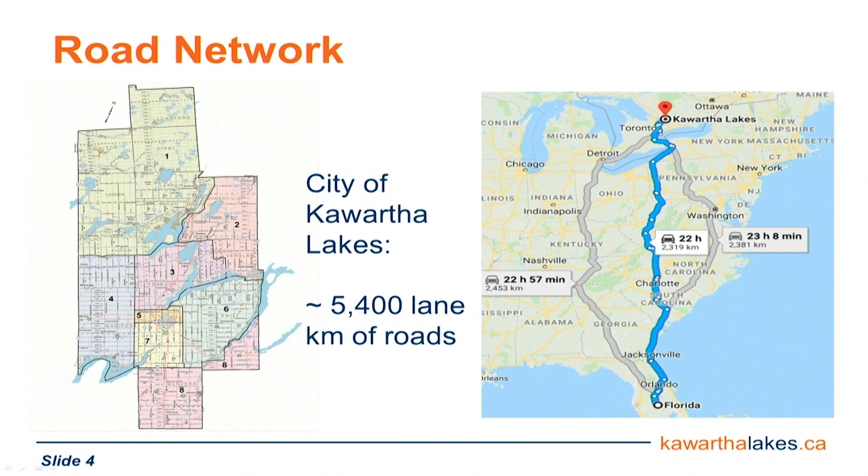Our road network is 5,400 lane kilometers of roads, and you'll hear the other directors speak about our roads as being 2,700 kilometers. They're talking about just driving down the center line of those roads. But actual lane kilometers to go both ways is 5,400 lane kilometers. So if you look at driving to Florida, which some may have done for March break, you could actually drive to Florida and back and still not have driven all of the roads within the city of Kawartha Lakes. Similarly, you could drive out to Vancouver, to the east coast of Canada, and partway back and have used up our roads.

So let's put that into some context about what that means as far as budget dollars and how we can fund the road projects that we're working on. If we look to the city of Toronto, they have approximately 80 households per lane kilometer of road. They have roughly 3 times as many roads as the city does, but they have 30 times as many households.

Coming a little closer to the city of Kawartha Lakes, if we compare it to the city of Peterborough, they have roughly 37 households per lane kilometer of roads. So they have actually similar households to us, but they have 5 times fewer roads than what the city has. And then finally, in the city of Kawartha Lakes, we have roughly 7 households per lane kilometer.

So when we're talking about that from a budget perspective, maintaining our roads is our biggest cost in the budget, and we're trying to spread those costs over 7 households on a lane kilometer basis versus the city of Toronto that can spread those costs over 80 households. So it's much bigger context.

So in summary, what we found in putting this presentation together is our maintenance costs are going well beyond the rate of inflation. We've seen increased weather-related events impacting that budget, both from a maintenance perspective and a construction perspective. So as we look to update our long-range financial plan, we'll need to take all of that into account so we can continue to invest appropriately in our roads going into the future without it being a significant burden.

And that concludes my presentation, unless there's questions.

Okay, so I'll hand it over to Director Rojas.

You're looking very sharp today, Director. I just want to point that out.

So my presentation is going to be focused on the capital aspect of roads, and Director Robinson will focus on maintenance.

From an organizational chart, so you have this in your budget book, and a lot of the information here is in your capital budget book, both capital and operating. This is our structure in engineering and corporate assets. We have 4 divisions plus the airport. Two of them, the ones in blue, mainly deal with the lion's share of capital roads.

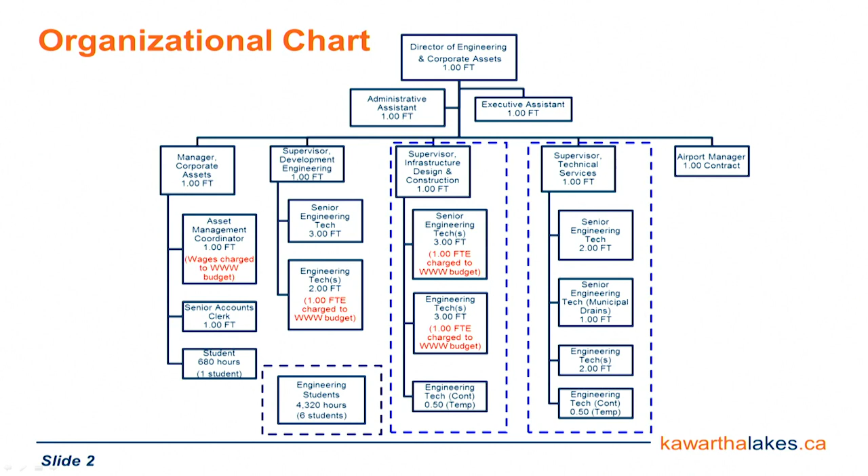So on the next slide: we have infrastructure design and construction with 1 supervisor, 3 engineering techs, 3 senior engineering techs, 1 seasonal, and that's for our resurfacing. He works a 6-month period, plus 2 students that help out. On the other side, we have technical services: 1 supervisor, 2 engineering techs, 2 senior engineering techs, municipal drains which are related to the roads, 1 seasonal who does the overlay for rural resurfacing, and 3 students.

The other two divisions funnel into the capital roads project in various different ways. Development engineering oversees private development, both private development and subdivision development. So through the course of time, when that subdivision development is assumed, we essentially inherit those roads. Any large subdivision, once the roads are inspected, we assume them and they become part of our database, our asset management base, and then they go into their life cycle of reconstruction and maintenance. Corporate assets is responsible for the life cycle analysis and the funding strategy of the roads. So everything is sort of intertwined with each other.

So different types of roads. This is our typical urban road standard. What our urban road means is it has curb and gutters on both sides, here and here, with a sidewalk on one side, fully serviced, an asphalt surface, and a street light.

Here's a nice example, a nice wide boulevard for snow storage. The property line is somewhere over here. The sidewalk is really close to the property line, and a hydrant and a grass boulevard. This is a typical, ideal urban road standard - no ditches, fully accessible, nice and wide, so you can have on-street parking and snow storage in the boulevard. Wherever possible, on any new subdivisions, this is what our goal is for an urban cross-section.

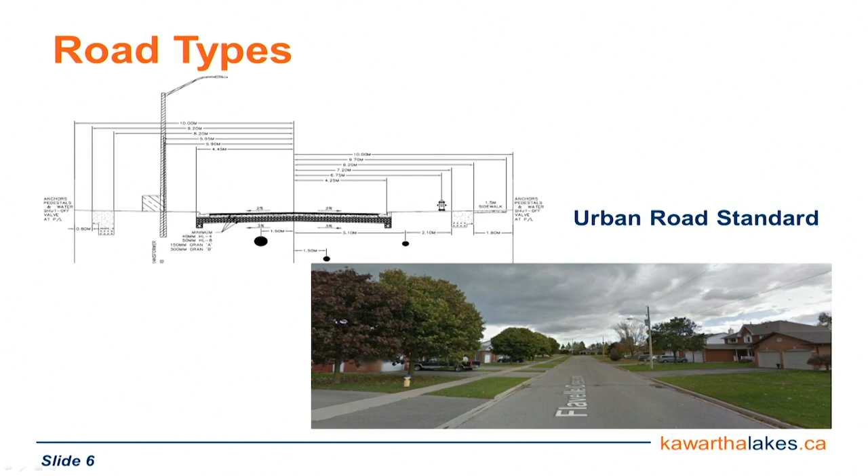So rural road surfaces. There are 3 different types, but they all share the same characteristics. There's a granular base and ditches on both sides. The ditches are low enough so that the granular base can drain out to the ditches and the water gets away. And again, this is an ideal situation.

Some roads have street lights, some don't. That just depends on where they're located. And then the utilities are usually buried or overhead. You can see a light here, and the utilities are buried. You can see nice ditches here and culverts underneath the driveways. This is an asphalt surface.

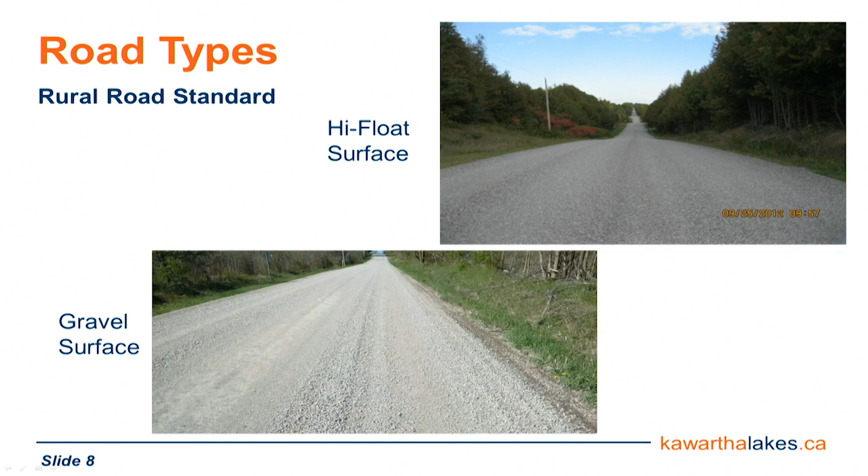We also have a high float surface. Again, ditches on both sides with hydro overhead, and then a gravel surface. Ditches on both sides with a nice wide platform. So those are essentially the 3 different types of rural cross-sections, 2 different types of roads.

So then we move on to classification. How do we classify our roads? Director Robinson will expand on this because it's also related to maintenance, but just strictly from a classification point of view, there are 2 driving factors that we classify all our roads by: one is speed, and one is AADT.

AADT is just your annual average daily traffic. It's the total volume of vehicular traffic on the road divided by 365 days - a straight calculation. We do traffic counts every year to maintain our database, and the rest we do estimates. Every 4 years we do a roads need study, and then we update the majority of our traffic counts. So there is a bit of a 4 to 5 year lag, but we troubleshoot the ones that we know.

And then we apply a growth factor, so that's how we come up with the ADT, and then speed. Depending on what the speed is, it triggers a category 1, 2, 3, 4, 5, or 6. So just an important note: if you look at this column, 6,000 to 7,999 ADT, that same volume of traffic could be a category 1, 2, 3, or 4 road, depending on the speed.

So for example, we have no 100-kilometer roads, so we have 90-kilometer roads. Most of our roads are either 80 to 71 or 51 to 60. So if we take an 80-kilometer road with the same volume, and we reduce that speed from 80 kilometers to 60 kilometers, it drops the category of road from 2 to 3. And that has certain implications, which we'll get into a little bit later. But there is a correlation between speed and ADT.

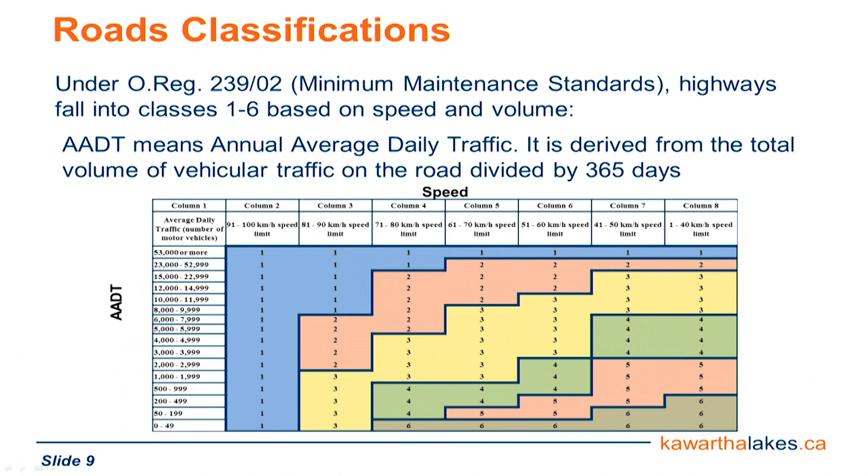So here's a chart, a summary of the 2,700 kilometers of centerline roads, and this is how they break down. We have no category 1s - an example of category 1 would be the 401, because we have no roads with that high speed or that high volume. Our biggest one is CKL 36, which is an example of a category 2. Here are just examples of the various categories. Most of our roads are classified as collector roads, either category 3 or category 4, so almost 1,400 are category 4.

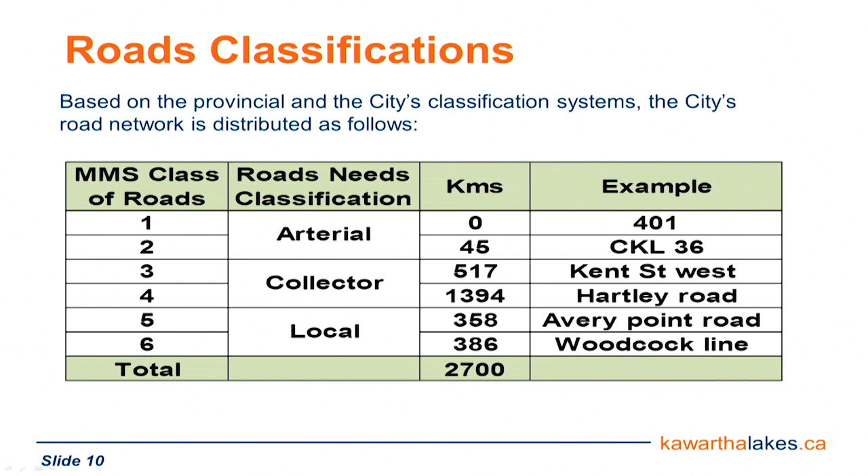This is from our roads need study. Every 5 years we hire an independent consultant to ride all our roads and rate them in accordance with the minimum maintenance standards and our standard rating system.

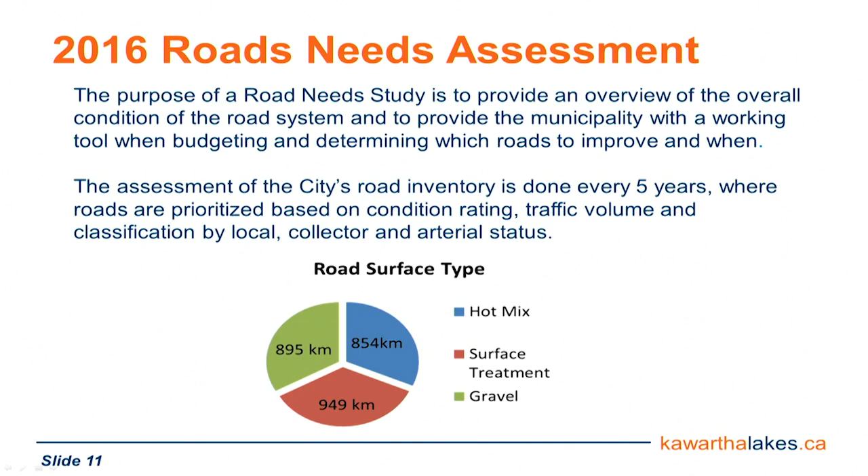It breaks down as follows: we have roughly a third, about 900 roads in each category, for hot mix, surface treatment, and gravel. This forms the basis of our long-term plan. We categorize the roads, rate them, and prioritize them based on both volume and road classification, so higher volume, higher road classification gets priority for dollars.

That's been our strategy moving forward, and for the last 10 years. The asset management plan was completed in 2016, and the roads need study done in 2016 was incorporated into our asset management plan in 2017.

During that presentation, there was a strategy of life cycle extension. How do we keep our good roads good? There are different strategies for that. One is to focus on your now needs, your poor roads now, and invest in that. But also preventative maintenance or preventative capital dollars, where if you hit the road prior to it hitting a threshold, you extend the life of it.

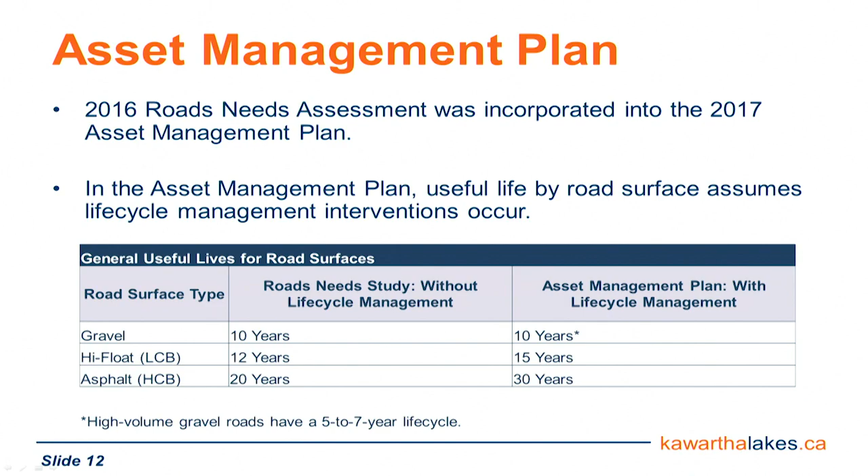That's what this chart tells you. For gravel roads, it's a wash, because gravel roads you regrade. Most of our gravel roads are on a 10-year life cycle, so every 10 years we add fresh gravel, a couple inches, to the surface. There are a few higher volume gravel roads on a 5 to 7 year life cycle, but the majority are 10 years.

High float roads, with no preventive maintenance, would get 12 years. By adding some preventative maintenance, we extend that life to 15. This 12 is a little generous, it's usually 10 to 12 years. Where you see your biggest return is in your asphalt: with no preventative maintenance you get 20 years before you have to touch that asphalt road, with a little preventative maintenance you extend that to 30 years.

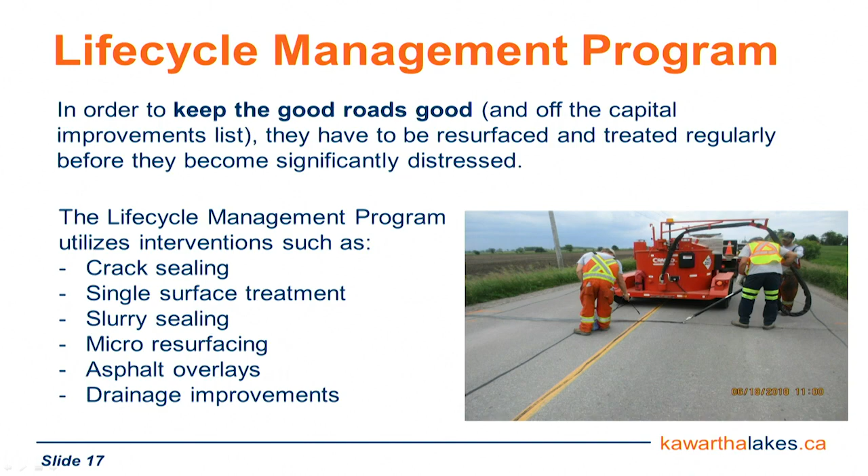It's not a full overlay or full reconstruction of the road. It's troubled areas that have experienced a lot of wear and tear over the winter — isolated sections that we could get into and repair. The strategy for life cycle maintenance is to keep our good roads good. The majority of the $1.4 million, about $1 million, is going toward keeping the good roads good, and $400,000 is going to troubled areas.

The next slide shows a typical life cycle of any road. You have time on one side and status on the other. The time varies if it's gravel, asphalt, or high float — anywhere between 10 to 20 years — but the curve is the same. You reach a point where, for asphalt, around year 10, if you let it go, the road falls apart real quickly.

This is a graph we've seen over and over again — it's sort of an industry standard. What it's telling you is that if you spend $1 here rehabbing the road before it gets to disrepair, you're saving 80 to 75% of the cost.

$1 here to do the same work would cost you $4 to $5 elsewhere. So that's our strategy of keeping the good roads good.

You don't want to get past this line, this is fair. Once you get past that point in the graph, it becomes poor, very poor, serious, and failed. So you don't want to be doing work in this area.

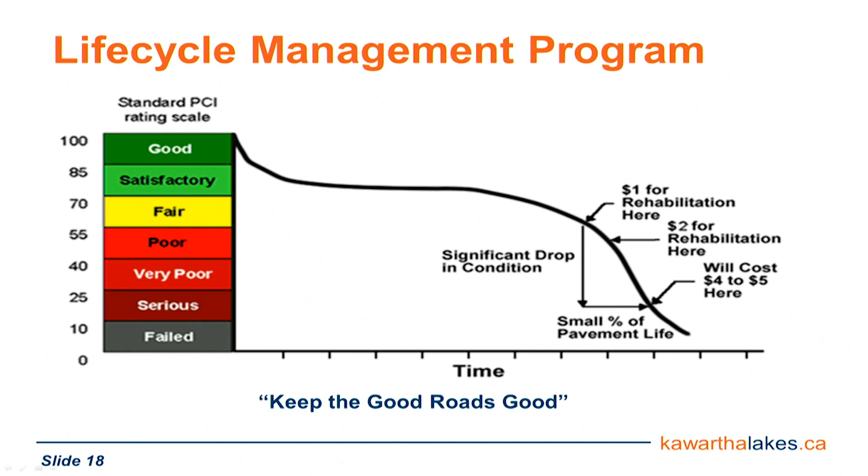The balancing act is we can't afford to do all our roads today, so we have to prioritize them and stage it. That's why we have a 4-year staging plan to gradually bring our tax base up to that sustainable level.

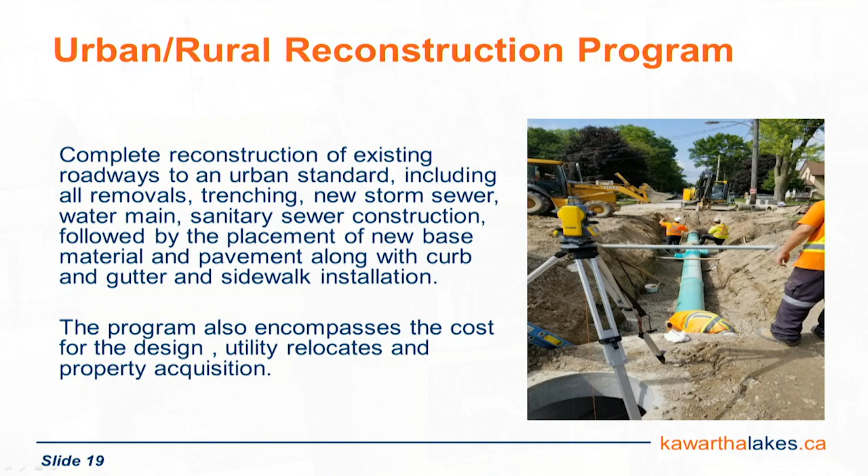The next program is urban rural reconstruction. This is a full reconstruction of the roads. We rip out the road, replace the granular base, replace the underground servicing if required, brand new sidewalk, brand new asphalt. It's the most intrusive to residents because you have a big ditch or excavation across the road. It's the longest, but it refreshes your asset.

Then we get to the resurfacing program. The resurfacing we broke up into urban arterial resurfacing. These are the higher volume roads we go through. Some of them through town have a gutter, some don't. That's why it's urban and arterial, a combination of both, but essentially they all get asphalt.

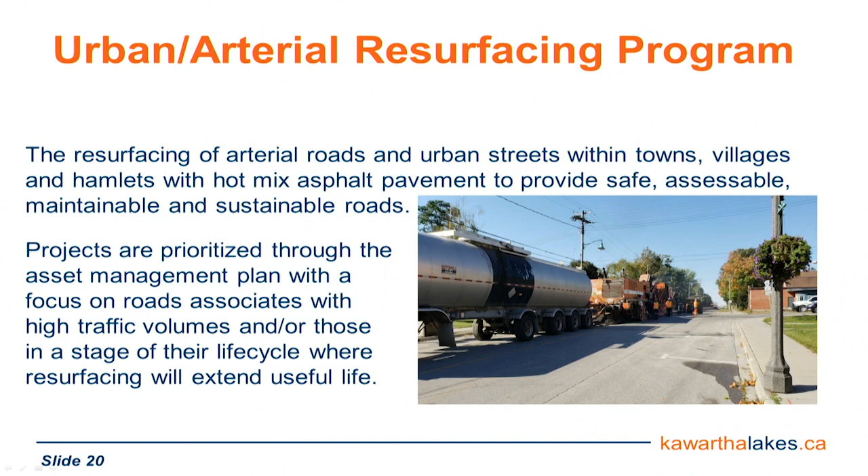There's a list of roads every year. This tender just closed about 2 weeks ago, and it's a duration from when the asphalt plant's open, May to November, is the scope of the road. We just overlay the road, we pulverize and overlay the road.

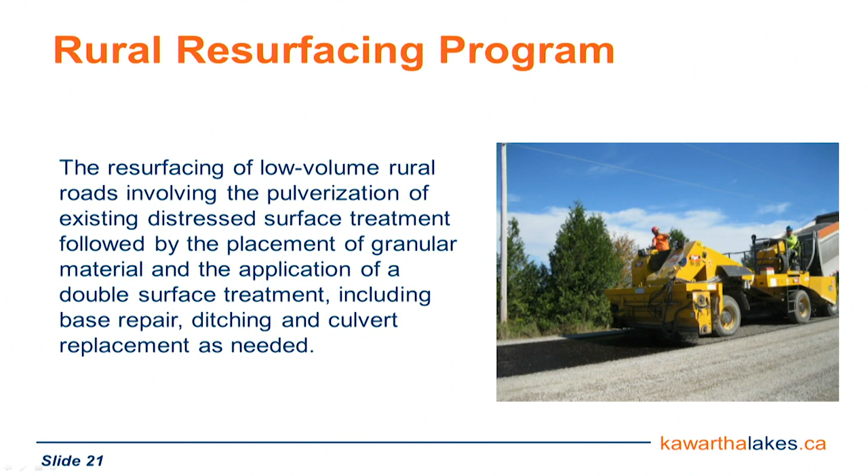The next one is the rural resurfacing, similar to the urban arterial resurfacing, but the majority of this is high float instead of asphalt. There are some asphalt sections, but high float is the majority of the money. We add granular base, and then we slurry seal and high float the driving layer, along with ditch maintenance and then whatever culverts need to be replaced. These are all rural roads, all over the county, fully rural cross sections.

And the gravel resurfacing program. So right now, our threshold - and we might talk about this later on - our threshold for when is it a gravel road, when is it a hardtop road. A hardtop road is high float or asphalt. The threshold we have is 400 AADT.

So those roads, we have a 10-year life cycle. And then we recognize there are some roads that are slightly higher traffic. So 200 to 300, we put them on a 7-year life cycle, and then 300 to 400, we put them on a 5-year life cycle. There are a very small percentage of roads that are over 400.

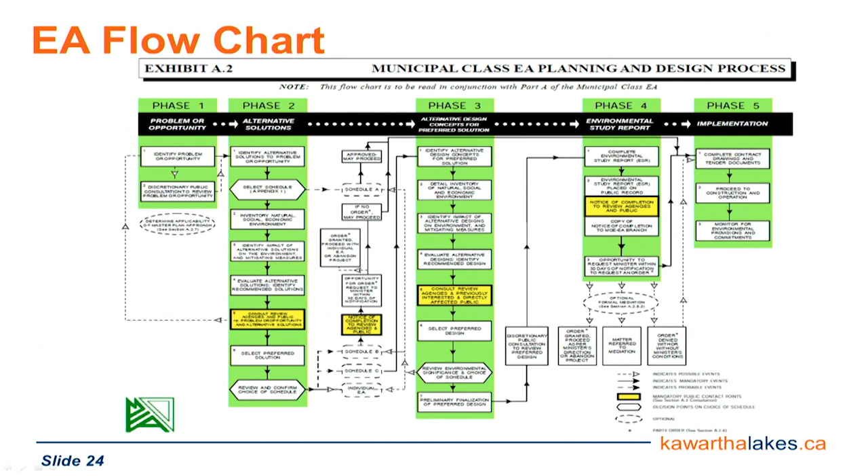So this is the chart, just for information. This is, in a nutshell, the flow chart of the municipal EA process. What's important to know is just the categories. You probably can't read the details, but there's phase 1, 2, 3, 4, 5. Phase 1 essentially is the identification of the problem, the issue, and phase 5 is implementation, which is construction. Everything in between is the decision-making process: how it affects the environment, the social culture, how you consult. That's basically phase 2, 3, and 4. But the important thing is identification, number 1, and the implementation, number 5.

So then they're broken up into different types of projects: A, A plus, B, and C. Depending on whether you're an A, a B, or a C, it means you have to do phase 1, phase 1 and 2, phase 1 through 4, or just phase 1 and then go right to phase 5. So it dictates what phases you have to do.

So then the next question is, how do you identify whether it's an A, B, or C? Projects that are A have minimal environmental impact. They're typically maintenance-related projects. When you sweep the road, that's a project. When you clear out a ditch or fix a pothole, those are projects. They're pre-approved — the ministry has said they're an A, standard maintenance. You don't have to give notice. You can go straight to implementation. Everything's pre-approved, just get it done.

Schedule A plus has a low impact. A lot of the Schedule A plus projects are road reconstruction where we're not widening the road or adding lanes. We have to be under a certain threshold, which I think is $2.4 million. It says you have to give some kind of notice. So most of our reconstruction jobs are Schedule A plus. We go above and beyond — we give notice and hold public meetings, which we don't have to do for a Schedule A plus, but we do it on all road projects. Then we go to construction. We always give notice at the time of design, and about 2 to 4 weeks prior to construction, we'll give notice again.

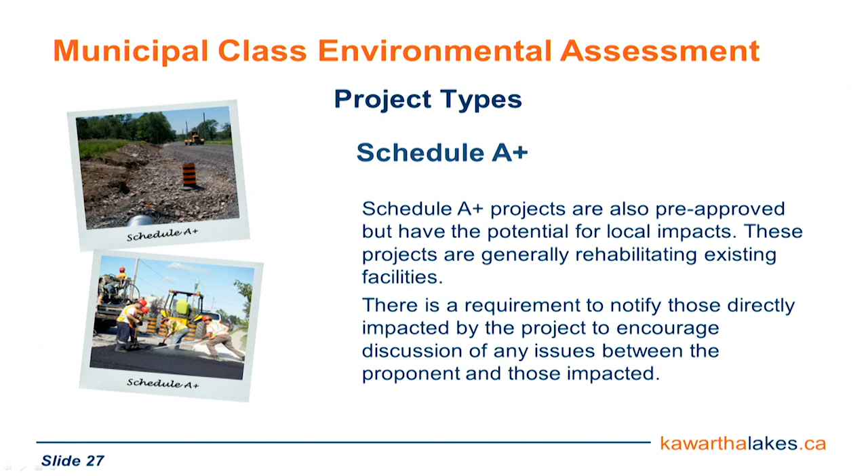So then Schedule B projects. For Schedule A plus, we have to do phase 1, which is notify, and then phase 5, implement, go to construction. For Schedule B, you have to do phase 1, notify, phase 2, consult, and then go straight to phase 5 to implement. So the other half of our projects are Schedule B, where we're not widening the road — no major expansion — but the dollar trigger is high enough that it warrants consultation.

Improving pedestrian access or improving turning movements would be considered a Schedule B. For Schedule Bs, we again go above and beyond. We do a presentation to council with the preferred solution. We have to look at alternatives — even doing nothing is an alternative we have to look at. Once that evaluation is complete, we come to council to present our findings. We get a resolution from council endorsing one of the solutions, and then we implement based on council's direction.

This is also made — the final decision and the project file is filed with the Ministry of Environment and is open for a 30-day public appeal period. Because for Schedule B, there are options that are weighted, and some people have thoughts on which options should go forward. That's why there's an appeal mechanism.

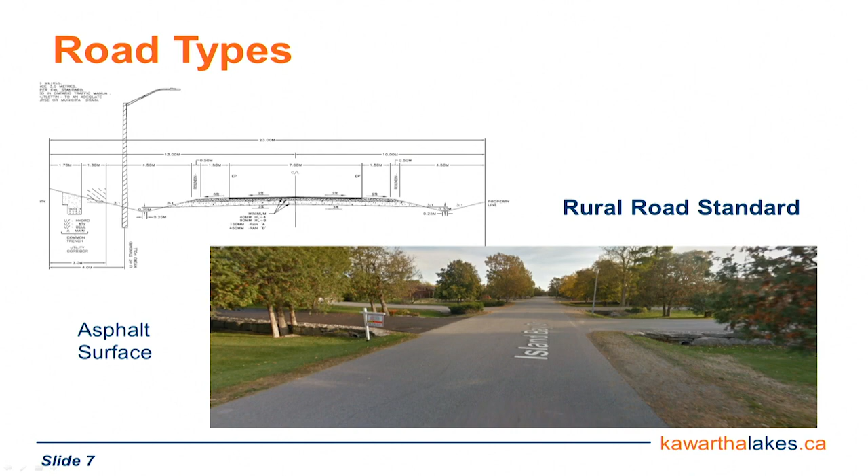I've cherry-picked these pictures because they show nice ditches. But if you drive around our urban or rural areas, maybe at one time you had good ditches, but they just filled up over time, or it was a forced road that eventually the municipality, county, or township just assumed — because it used to be an old logging road or farm road — and we just took it over without really redoing the base or redoing the ditches.

So I think a way of mitigating the freeze-thaw cycle is to have drainage. Everything comes down to drainage.

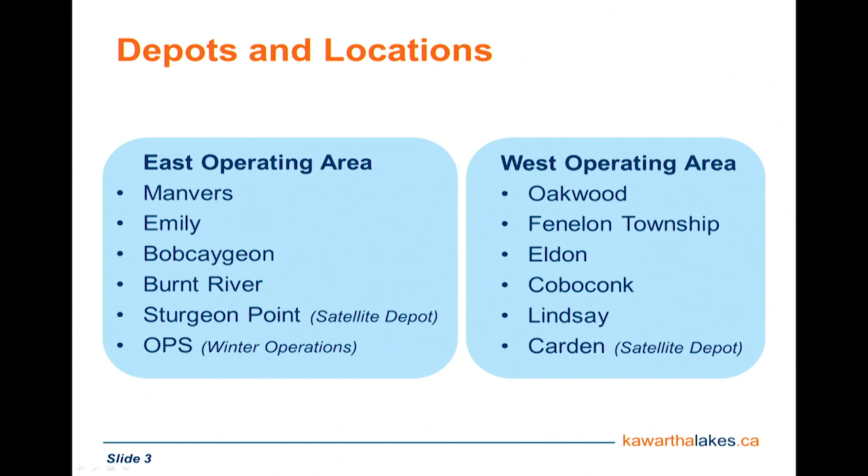Some of those facilities right now—there's 9 primary ones where the operators work out of. The 3 there—Sturgeon Point, Ops, and Carden—are either satellite and/or winter-only operations facilities at this time.

So what we do, again operationally based department: we have roads, bridges, building maintenance—our roads and bridges is primarily our business. We maintain our own buildings as well. We have winter control, traffic streetlight maintenance, citywide operational programs, which I'll explain a little bit later.

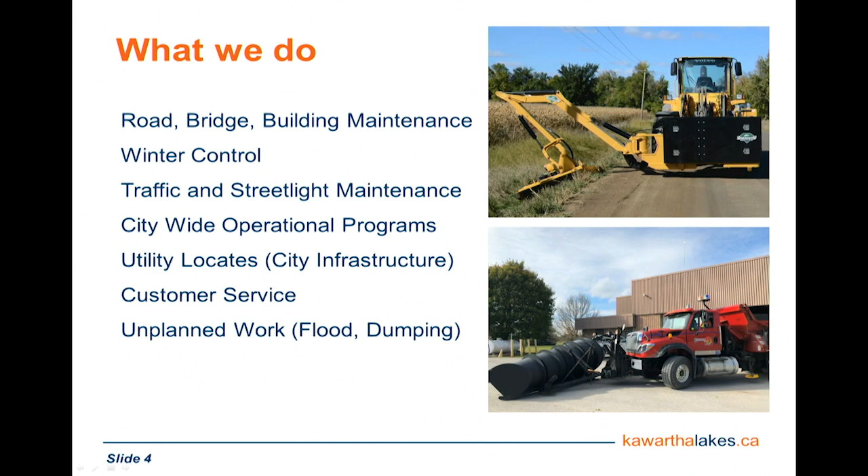Utility locates, again, that's the requirement under the Ontario Underground Infrastructure Notification System Act, and the reason why those positions were created for locates. Again, we have our own customer service support staff, and a big piece of what we do, believe it or not, is unplanned work response to emergencies like the flooding we had recently, illegal dumping, and other activities that happen around the municipality.

I'm going to touch a little bit on several areas, and I'll probably stop between so that we can have an opportunity to ask questions if there are any.

First of all, I want to talk a bit about minimum maintenance standards. Everybody hears me and staff talk about MMS and minimum maintenance standards—what are they, what do they do? They are really our guiding principles for winter operations. It's an act, a regulation—effectively Ontario Regulation 239/02. It's been in place since 2002 and has received several amendments throughout, most recently last year.

They're really developed to provide municipalities the defense against liability claims. So if municipalities are able to achieve the requirements under minimum maintenance standards and document that we're providing that level of service, our obligations to the public have been met. There's a lot of give and take in that statement, but that's really where we provide our level of service in accordance with those minimum maintenance standards.

Regulation 239 came into force November 2002, as I mentioned. It's been updated in 2018. The regulation is a living document, and I can talk a little bit more about some of the changes that are happening to that document now.

So they are based on the classification of highway. Director Rojas talked about road classifications anywhere from 1 to 6 identified. I want to be very clear that we have no Class 1 roads. We have very few Class 2 roads. The bulk of our roads filter between 3, 4, and 5. We have many Class 6 roads.

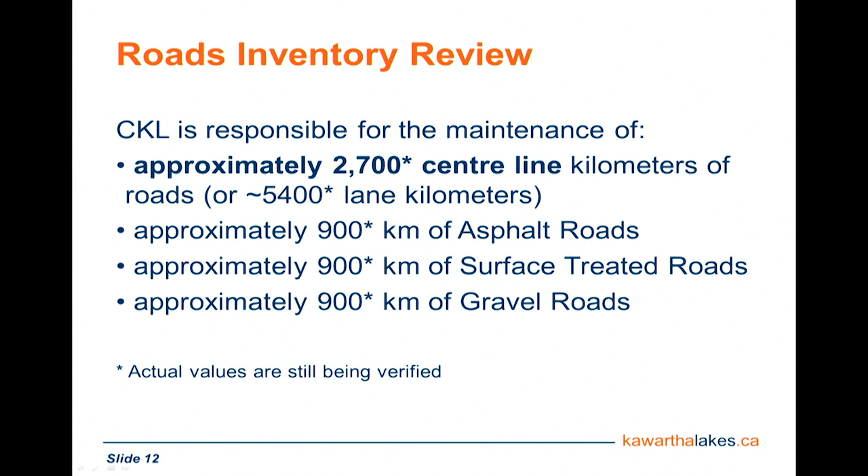I've put a caveat on there that the values are still being verified, and that's because that database is growing. As we continue to undertake our review, we're determining and finding new unassumed roads, we're finding new private roads, we're adding every single road segment into that database so that we have knowledge of what roads there are within the municipality. We're continuing to confirm road status, being unassumed, assumed private or forest roads.

One of the big processes we're undertaking, and revisiting right now, is to confirm what maintenance services are being provided on those sections of roads. To us, a road segment is a road from one point to another point, from one intersection to another intersection, or from an intersection to a dead end. That's how we're laying out that database. We have 4,428 road segments in that database right now, and it's continuing to grow.

So again, we're trying to confirm our activities, whether we provide summer service, i.e. grading and general activities like that, or whether we're providing winter service, or both. Just because we provide summer and winter services doesn't mean we're fully maintaining that road. There's other aspects like the ditching, drainage programs, brushing, and general other upkeep that are activities under our group.

Just to give you a couple of numbers, there's about 1,683 segments assumed by bylaw. We need to go through all 1,683 segments and confirm those bylaws are actually those assumption bylaws, because we've made some assumptions on those bylaws that have been inaccurate in the past and roads haven't been assumed. That doesn't mean we're going to cease service, we're going to continue service on those roads, but we need to understand the legalities around those roads and the assumption thereof.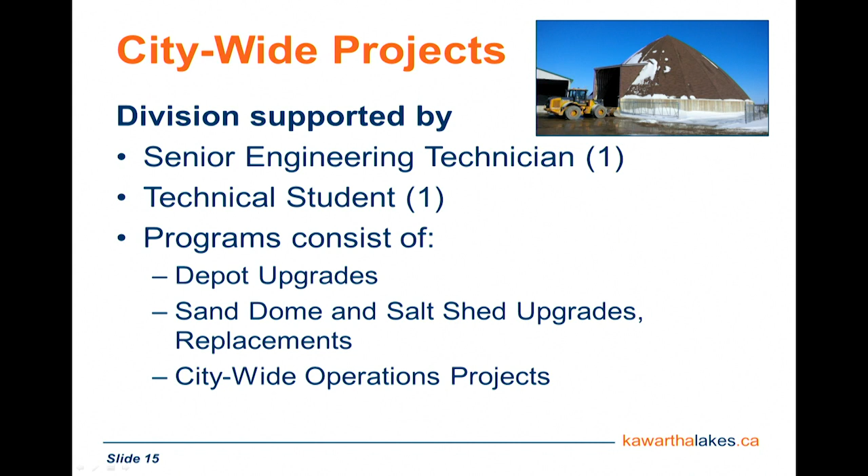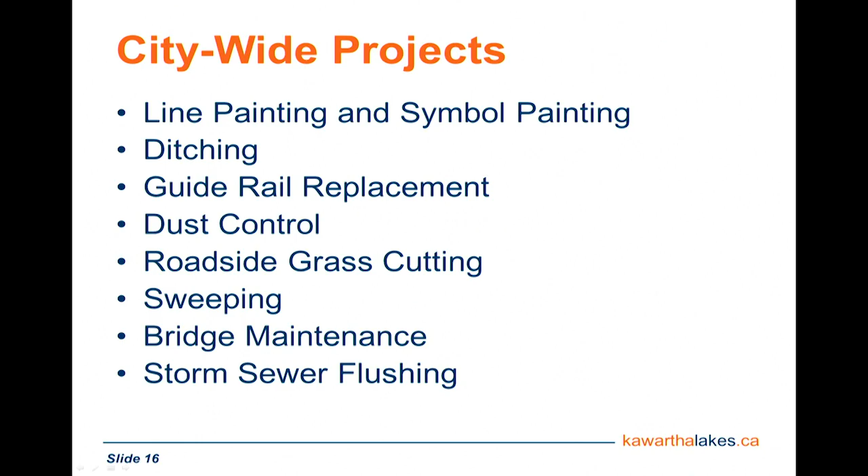So the programs that the one senior engineering technician in the support works through are the line painting and symbol painting program that happens on an annual basis, our citywide ditching program, guide rail replacement program, dust control, roadside grass cutting, sweeping, bridge maintenance, storm sewer flushing. So this is one staff member coordinating all these activities for the entire city. It's a large program.

Some of the more crucial aspects of maintaining the road and the road structure, as Juan was talking about with the ditching program, the dust control - council's aware we've significantly increased the amount of calcium chloride applied to roads to control dust and really help bind and build the integrity of our gravel roads. Those programs are coordinated through that citywide area.

Any questions on that before I move forward? Okay, we'll move into what the roads operations frontline staff do on an annual basis.

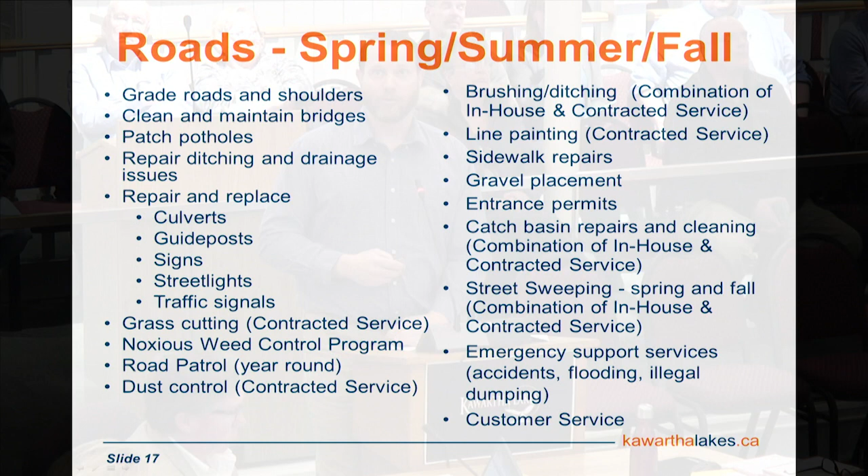So again, we grade roads and shoulders, clean and maintain bridges, expansion joints and so on. We patch potholes, which we'll talk more about going forward. We repair ditches and drainage. We repair and replace culverts, guideposts, signs, streetlights, traffic signals. We do roadside grass cutting, noxious weed program, road patrol. Again, we talked about dust control, brushing, ditching programs, line painting, sidewalk repair, gravel placement, entrance permits.

These are all, I can keep going, but these are all programs that we deliver on a daily or annual basis within our operational group. The last one, the newest kind of support that we provide, is customer service, and I'll speak more about that as we move forward.

So specifically, pothole patching. A pothole is a type of failure in a road surface, caused by the presence of water in the underlying soil structure. As Director Rojas is talking about, drainage is crucial for roads. We need the water draining out of the road subbase in order to maintain the integrity and strength of that road. As the subsurface becomes saturated, either by the inability to drain or by other materials plugging that, if we have cracks in the road, water getting down into that structure will freeze, raise the road,

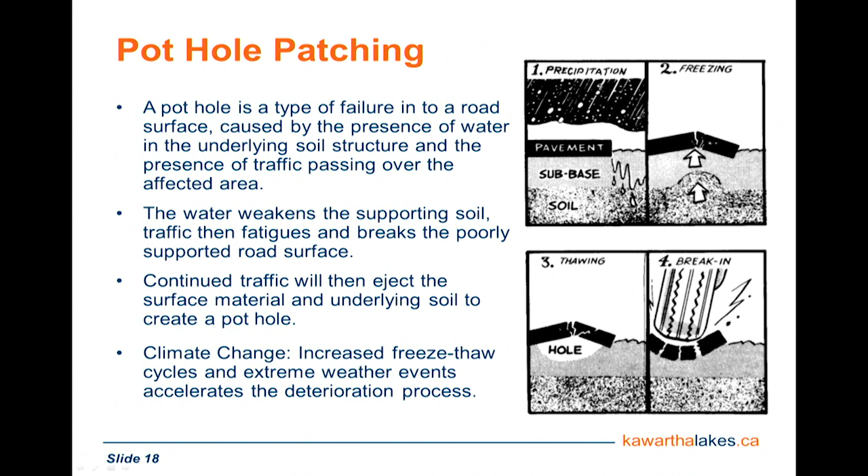Prevention, again, drainage improvement. Our ditching program and brushing program are two key components of facilitating drainage for roads. Preventative maintenance, the life cycle extension program coordinated through capital projects, looks at rout sealing a lot of those roads to prevent water from getting into the subbase through the road surface. Utility cut management is a piece that's coordinated through our group to manage and make sure those utility cuts are repaired in an appropriate manner.

Within Public Works, we do temporary cold patching. Temporary cold patching is a necessary evil. We'll never get away from it. We are looking at alternatives, though. We have semi-permanent repairs now with 3 hot boxes, which are effectively heated trailers to store hot mix asphalt, the same surface asphalt you see on a regular road, and we can patch holes with that hot mix asphalt. We're seeing the life cycle of those patches last longer, but they are still a patch.

There's another product we're piloting right now called Instarmac. It's a cold in-place repair. They're calling it a permanent patch repair, and while it's not truly permanent, we're seeing significant life cycle extension. If anybody drives across the Queen Street Bridge over the river, we patched that bridge with that product almost 2 years ago, and we're just starting to see some of those patches start to come out now, versus cold patch repairs, which pretty well every couple of weeks you see start to blow out. So we're seeing success with that. That product is 11 times the cost of cold patch, but if we're seeing that level of success, we're going to continue to expand its use. That's something we're working on as well.

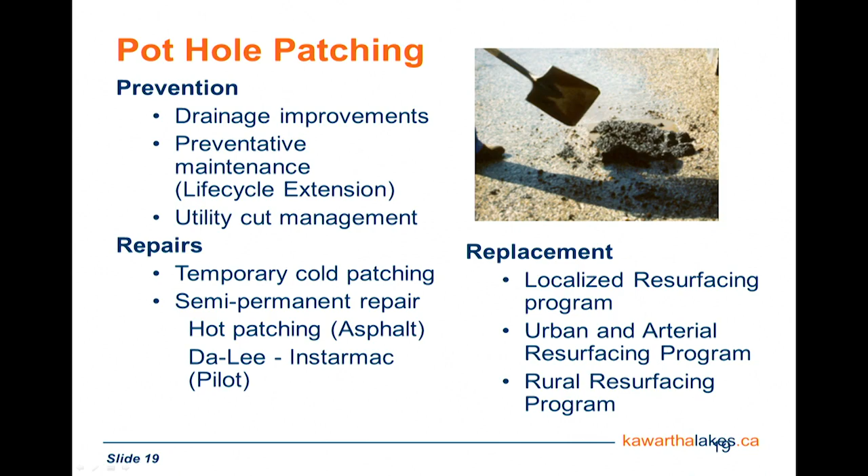And again, the last piece of prevention really is replacement. Capital programs for localized resurfacing, urban and arterial resurfacing, and the rural resurfacing program. So those are the ways that we can continue to manage and mitigate pothole patching or potholes.

I want to talk about minimum maintenance standards related to pothole patching. We frequently get calls from the public saying there's a pothole in this road, and they'll call back in the afternoon and say, you haven't fixed the pothole yet, what's going on? Our operations staff are generally deployed to patching if we need that. If we're doing winter response, there's nobody available to pothole patch. We have 61 routes, 65 drivers. Effectively everybody assigned to a truck is in a truck. So there's a limit to that.

The piece that layers on top of that now is minimum maintenance standards and requirements. As we talked about before, class 1 through class 5 roads, class 6 roads are outside of the requirements for minimum maintenance standards. These are response times, so I have some show and tell with me.

Just to give council and the public a bit of an idea, a class 2 road -- this is our Road 121s, Kent Street, Lindsay Street South, Little Britain Road, all kind of class 2 roads. We have, this is a pothole, this size, this depth, this area would classify as a pothole on the road. Sorry, the tables -- it's actually 7 days, not 4. This was old information. MMS requires a 7-day response.

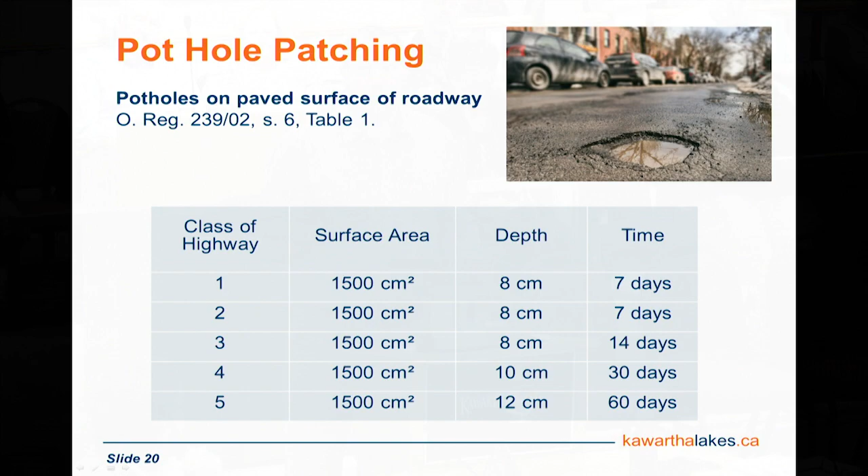Once a pothole is reported through our customer service center, it's logged into our system. That information is sent through to our supervisor, who then coordinates response to that activity. For a pothole on a class 2 road of this size, it's a 7-day response. Moving up to class 3, 4, 5 roads, you're up to 14, 30, and even 60-day response required under minimum maintenance standards. That's the piece you need to consider.

As we move into some of the lesser roads, class 3 highway -- let me move forward here. So if we get back into hard surface roads, these are effectively class 3 highway. This is a 1,500 centimeter square pothole that's 8 centimeters deep. This is the kind of surface area you're looking at. So for class 3, 4, 5 roads, it's 10 centimeters, 30 days, upwards of 60 days. We're frequently achieving a level of service that's far greater than that, responding and providing repairs in a more frequent, higher level of service.

Again, a pothole patch is a temporary response. It may last a week, two weeks, or a month. As that pothole regenerates, our response time requires us to go back out and re-respond to that event. The challenge is the level of service, expectations, and minimum maintenance standards don't always align. We do the best we can with the resources we have.

You're welcome. Go ahead. Thank you. So the next one is really along the same thing of pothole patching. This is the table that talks about paved surface roadways - for gravel surface it's very similar. For that large sized patch, the 1,500 centimeter square patch of a depth of 8 centimeters, we have 7 days to respond. We have 14 days, we have 30 days to respond.

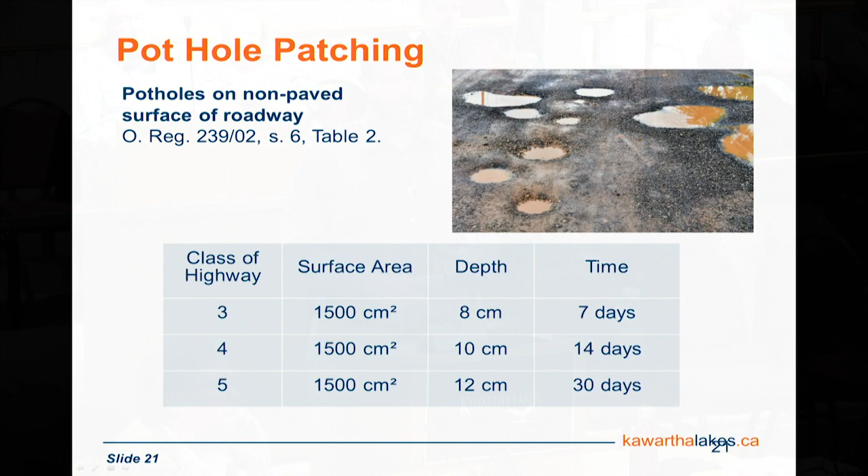So for gravel roads, it's far more difficult to manage potholes. That's because in this shoulder season we're in right now, as we come out of winter into spring, potholes develop very, very quickly. The road's partially frozen, the road's base is certainly saturated. If we go out and grade a road in that condition as it sits there right now, that road will turn to mush, it will turn to mud, and will be destroyed.

So although residents have legitimate concern over potholes on those roads, we don't have the ability to touch those roads until conditions are conducive to touch them - that would be applying the road with a grader. So in cases past we have applied some gravel to roads and brushed it over the top to fill potholes to gap us through until we can grade them.

Each depot now has its own drag - that's a piece of equipment pulled behind equipment that doesn't do a full depth of grading, but effectively scratches the surface to help fill potholes temporarily to gap us through until we can properly grade the road. But that's definitely a challenge for us because a lot of the time our staff are equally frustrated over the condition of the roads, but we just simply don't have the capability to respond without making the situation much worse than it already is. So again, response times are there - 7 days, 14 days, up to 30 days to respond to potholes per minimum maintenance standards.

Getting on to some of the other activities we perform - road and shoulder grading, we talked a bit about that just a second ago. Typically we will grade loose top or gravel top roads 3 to 5 times a year, more if needed. We try to tackle shoulders 3 to 4 times annually. Again, cause and effect of potholes on gravel roads is similar to asphalt roads.

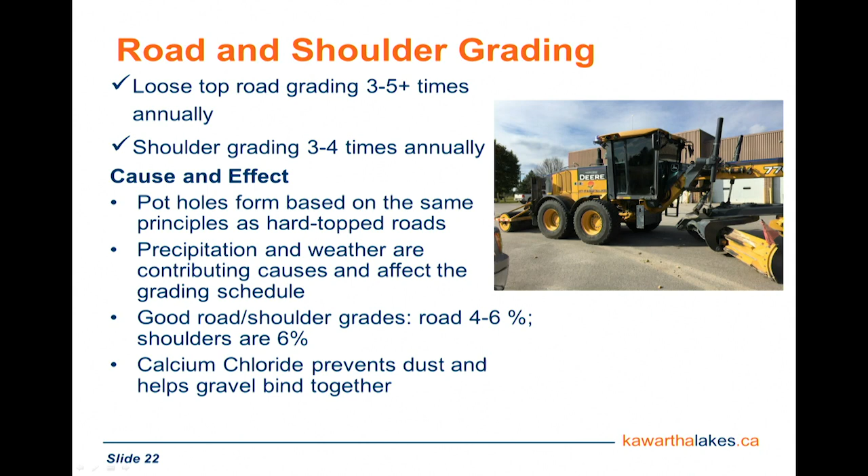We try to grade our roads at 4 to 6% crossfall, shoulders at 6% crossfall. That is to allow the water to shed away from the road surface and not sit on the road and penetrate in. And then again, our calcium chloride program that we've recently expanded helps bind the road together and create a seal on that road surface.

Roadside brushing, again, talked a bit about that already as well. We do coordinate a lot of that roadside brushing program with the capital project.

Again, I'll try to get through the rest of this. I'm not sure where we are in timing. We're fine for timing? Okay.

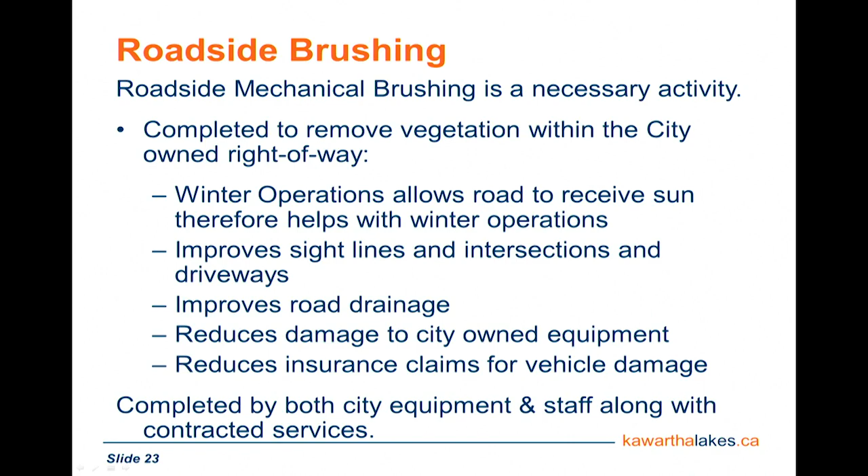It supports multiple programs, as we remove vegetation from the road allowance, allows proper drainage in the road, and allows the sun to get to the road surface. There's many back roads where we have vegetation right at the edge of the road. Those roads typically stay iced longer, they stay frozen longer, and it impacts the roads. So if we get the sun down to the road surface, it helps us melt off ice and snow on the roadways as well.

So we complete that service with city and contracted services, a blend of that coordinated by supervisors and the senior engineering technician.

To move forward, talk a bit about drainage. I won't get too far in depth here. This is a very similar cross section that was shown by Director Rojas about the gravel road, the structure, and then the ditching on the other side of the road. Not only our standards, but these are Ontario provincial standards that help show that required structure for the road.

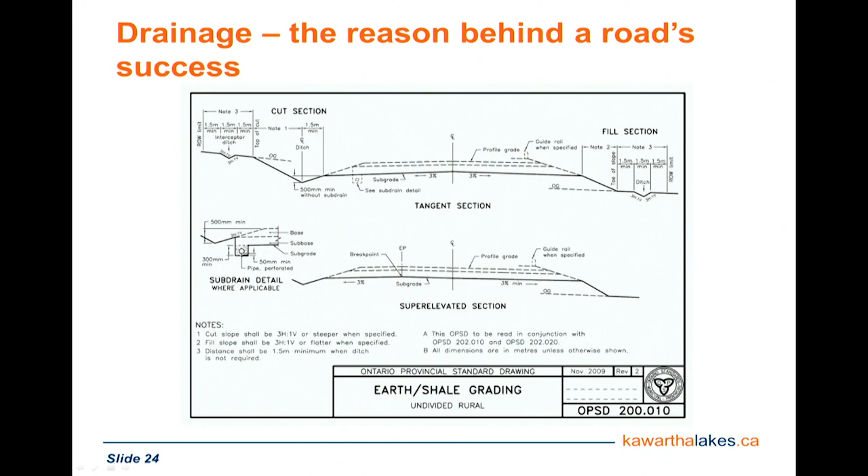Again, we have a budget for this within our operations group. The entire budget is not spent within our typical operations. We do coordinate a lot of activity ahead of the capital program, and we try to stay about a year ahead of that program. So we're now brushing and ditching roads that are in the 2020 capital plan.

Winter maintenance is always a fun topic to talk about as well. We are again governed by our minimum maintenance standards. We're governed by the CKL level of service council policy that's been adopted, and we are governed by our own operations and maintenance guidelines.

So from November 1st to April 15th, road employees patrol, sand, and salt roads, sidewalks, and parking lots, cleared usually about 6 to 8 hours after an event happens, depending on the length and severity of that event. Those are our kind of commitments and typical guidelines when we're talking, and they relate back to our level of service document.

Winter maintenance, so again, a big factor for us is equipment readiness, housekeeping, best practices, response to events. So we have 61 internal plow routes, and we have 6 spares right now. So we have 67 trucks that are maintained in-house and through contracted services, but coordinated through our fleet services department.

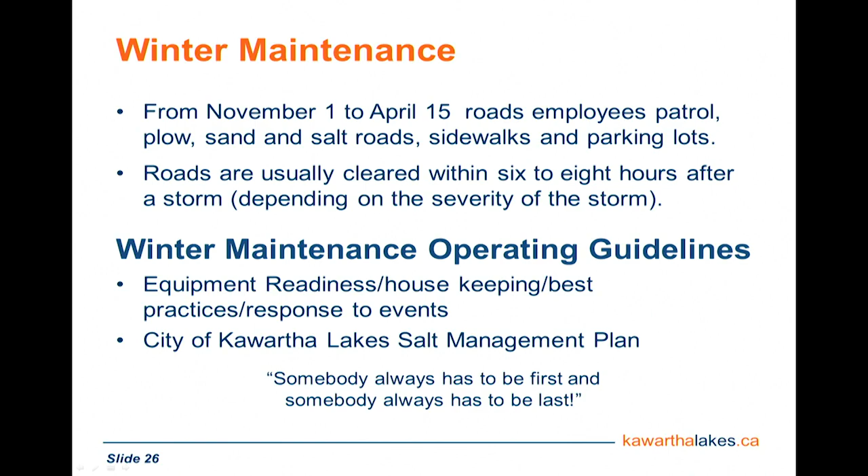And the other piece that we have here is a salt management plan. So the city has adopted a salt management plan that provides guidance on how we provide salt. One of the key factors we hear is that it's 8 o'clock in the morning, I'm trying to get out, my road hasn't been touched yet. We have routes that take 6 to 8 hours to complete.

Typically in the winter, if it's a significant event, we will deploy resources at 4 a.m. So that means half the roads are touched before 8, half the roads are touched after 8. There's always someone who has to be first and someone who has to be last, unless we want to significantly change how we structure and deliver our level of service, which is always a resource impact.

We get into winter patrol. So these come back to minimum maintenance standards. Patrol is a legislated requirement under that minimum maintenance standard. So we patrol our roads in the winter 24 hours a day, 7 days a week through that window.

This year's been a challenge to get enough crew leads, so we're only running 2 patrol areas right now. In the future and moving forward, we'll have 3 patrol areas - we're going to have a north, east and west patrol area.

Again, patrolled 24/7, 365. So they are documenting winter conditions, documenting any deficiencies in that service. They are calling out, deploying resources as needed, calling off those resources as needed. They're keeping a full journal of everything that's happening through that time period so that we are covered under minimum maintenance standards from a liability perspective.

So those patrol positions are actually our crew lead positions, but they're providing the service of winter patrol. So they are new positions that were created that have a heightened level of accountability and responsibility with respect to minimum maintenance standards.

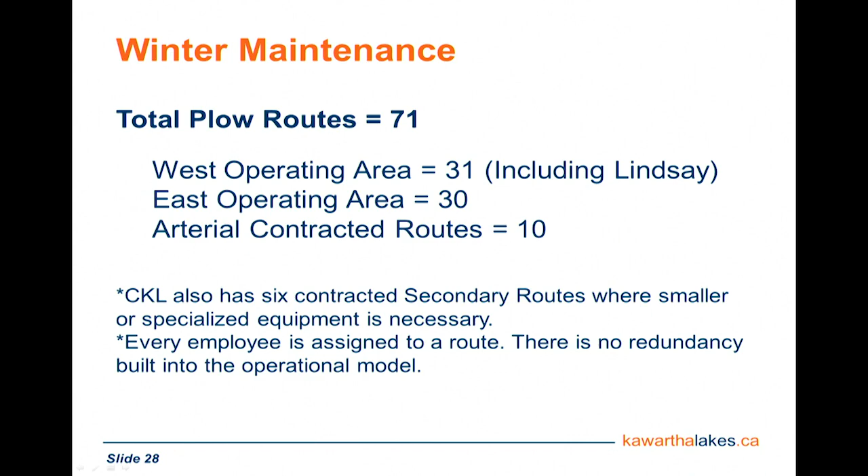Every employee is assigned to a route, so there's really no redundancy built into our operational model. This year we've had a challenge with staffing, as most years in the past, so we've been forced to contract out 2 additional routes, pulling some of the crew leads that would have normally been in the crew lead and patrol role and putting them in trucks this year. So we've had to really compromise where we want from a minimum maintenance standards and level of service to deliver the services to the residents this year.

Getting into materials, the city uses sand and salt. Salt, I want to be very clear, is only used on asphalt roads. Salt is not used on surface treated roads, and salt is not used on gravel roads. The primary reason is salt will damage the road. Salt lowers the melting temperature and softens the road surface. So if you put salt on a gravel road, it will turn the surface of the road to mud, to mush, and it will damage the surface of that road.

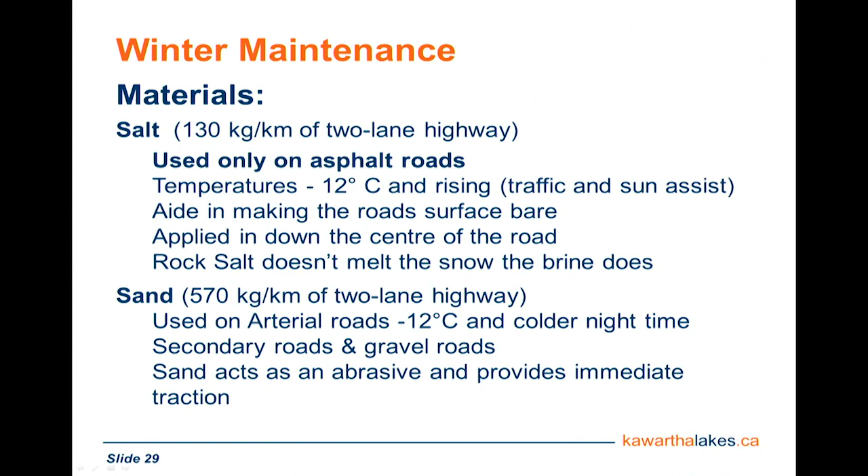Salt is only used in areas and temperatures of minus 12 degrees and rising. If it's below minus 12, salt doesn't do anything, so unless the forecast says it's going to come up, we won't use salt. We will use sand on roads to manage that instead. Salt application rates and sand application rates are defined within our salt management plan and our level of service documents. Any questions on that before I move forward?

Last couple pieces for winter events. Staff record events for maintenance tracking. We've had a lot of discussion over years past about a winter event, how much does a winter event cost. It's very, very difficult for staff to tell you how much a winter event costs on a regular basis.

We've done a couple average events, pulling out a couple isolated incidents. The average call is about $125,000. So if we have no snow, then we get 8 to 10 centimeters of snow overnight, the snow stops, we do one round of service and call everybody back in, it's about $125,000.

Our budget allows for approximately 50 average events within the municipality. I can tell you that events, as they stand, can range anywhere from 50,000, maybe even slightly less, to over $500,000, and that is based on a number of things.

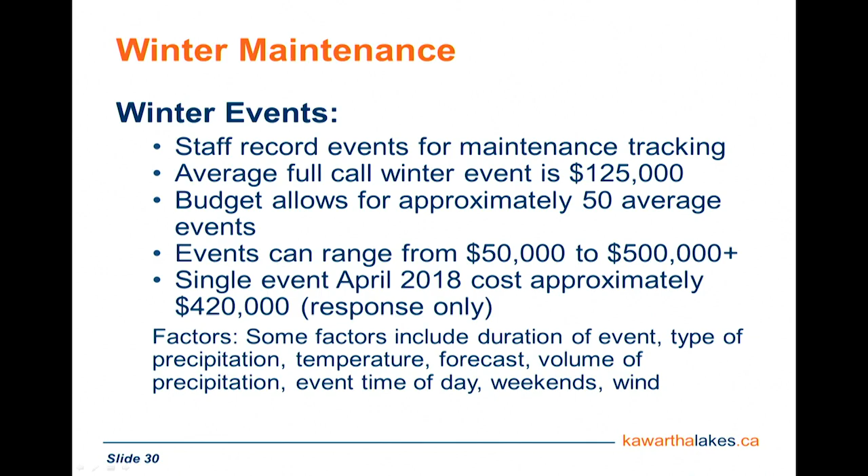If you look at the factors at the bottom of the slide there: the duration of the event, the type of precipitation, freezing rain versus snow, the future temperature, the current temperature of the road, volume of precipitation, the event time and day. So on weekends there's obviously a premium cost to us, and events happening in the evening again have overtime costs related to it. Wind this year has been a huge factor for us, as wind events and gusting snow and blowing snow require response to those events.

As a reminder, everybody here last year went through that significant event in April of last year. It was a 4-day long freezing rain, blowing snow, everything event. It happened through Saturday, Sunday, Monday, Tuesday, started Friday night. That one event cost the municipality about $420,000 in response only, and that doesn't factor in the cost of our management, our supervisors, and other events. So that one event is a huge hit to the municipality.

As long as you promise.

City of Kawartha Lakes has 5,400 lane kilometers of roads and a population of 75,000, based on 2016 data. The 2019 winter control budget for roads, excluding sidewalks, is about $8.1 million. Cost per kilometer is about $1,500, but cost per capita is $108 - so a large cost related to the number of people.

If you compare us against neighboring and comparator municipalities, our cost per kilometer is right in line or low compared to others, but our cost per capita is very high. That comes back to the number of roads versus the number of people we have.